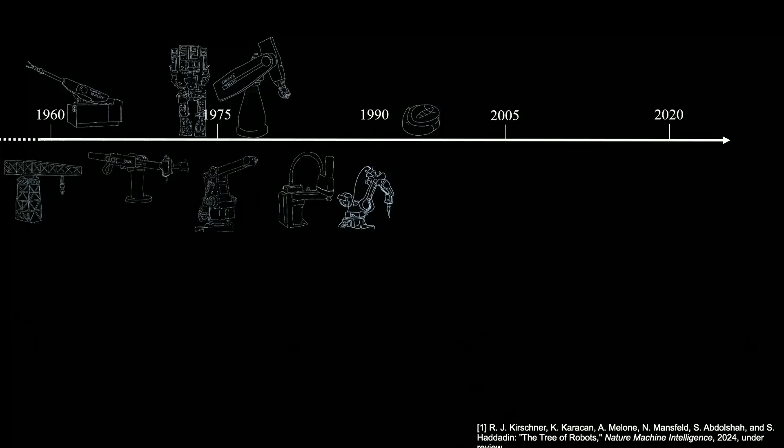One obvious thing happening now is that we see more and more robots coming, iteration after iteration, and we now live in a time where humanoids become reality, at least according to media and many videos. Compared to when I was a student, and compared to my teachers' time as students, robotics seems to be taking exponential leaps.

From the embodiment side, it feels like a decadal problem—it typically takes 10 to 20 years to get a new generation of robots. I was myself involved in one of these, as Thorsten mentioned. At the same time, this is the limitation we dramatically face.

My talk today is really about how we can accelerate that—not just looking at robotics as embodiment, but also intelligence, and how we can accelerate both. We all agree that on the intelligence level, algorithms and AI have made great progress accelerating over recent years. But the same question applies to embodiment: how can we increase the speed and capabilities of robots beyond what we see today?

Compared to when I was a student, now as a professor doing research, I feel something is missing—we need to speed up to keep pace with the amazing progress happening at the intelligence level. With the dawn of AI over the last 10 years, there is so much potential. How can we really use this human-AI cooperation to accelerate progress?

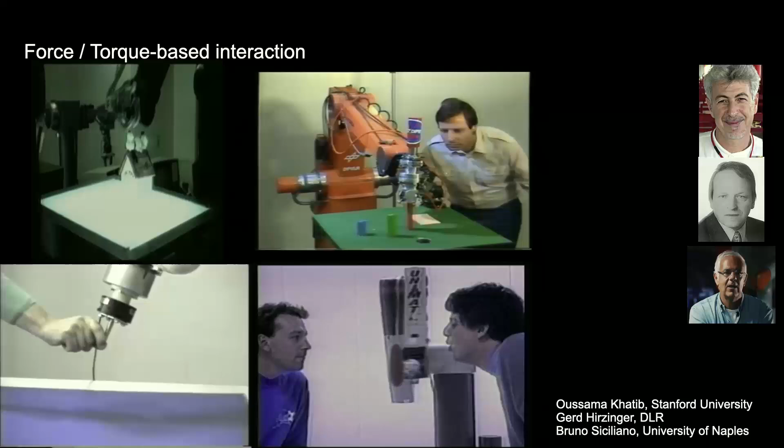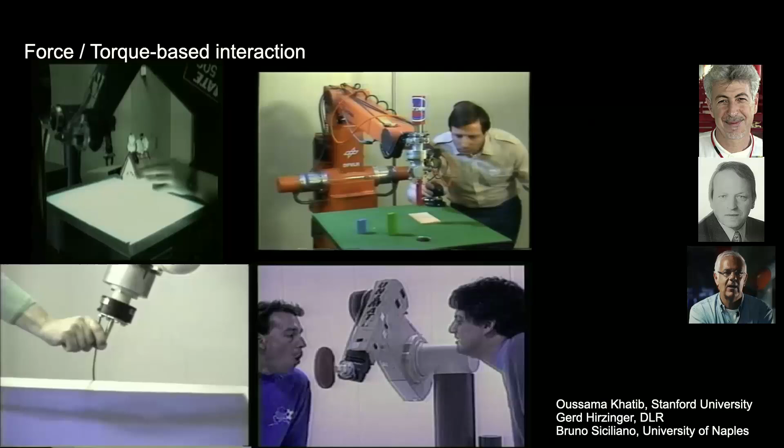They laid the foundation for the robots we have today—we heard about the Franka robot—providing the inspiration and fundamental basis that I, along with many of my colleagues and students, could draw from.

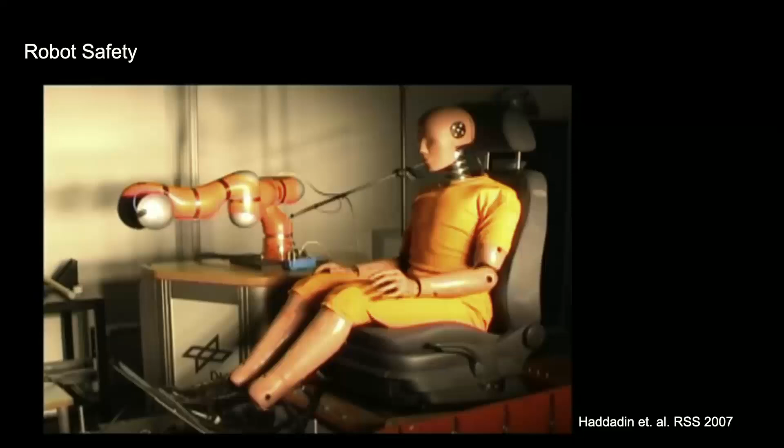We have obviously all kinds of research, so this is something I needed to do when I was a student. Robot safety was a big thing back then, because there was this idea that humans and robots cannot collaborate. Around the mid-2000s, it was common knowledge according to standards that humans and robots shouldn't share workspaces. So lots of my work was about that.

Back then, at my time at DLR, which was really a great time, I was tasked with the idea of, okay, can we actually make robots safe, and how can we quantify the safety levels there? And obviously I found some interesting results. They were kind of contradicting the previous state of the art, in the sense that maybe we actually have a chance to collaborate, and there's evidence based on crash testing, but there was hard belief against that.

Back then I thought, okay, there is a - I'm half Finnish, my mother is Finnish - so I thought of the Helsinki Declaration, and I did these experiments to show that these robots are safe.

So this was at night, kind of 6 hours of crash testing with my own body. But I think it led to this understanding that humans and robots can interact with each other safely, and the human is victorious over the machine, as long as the machine is lightweight, safe, and equipped with certain sensors and collision detection algorithms. We kind of have a good time there.

At the same time, we were working with KUKA, one of the biggest European robot manufacturers, developing all these collision handling algorithms that many of you probably know. The idea was really to make these robots safe for interaction, but also to break ground in terms of what became this collaborative robotics, soft robots and tactile robots that we see today. So really the early days of bringing this technology to reality.

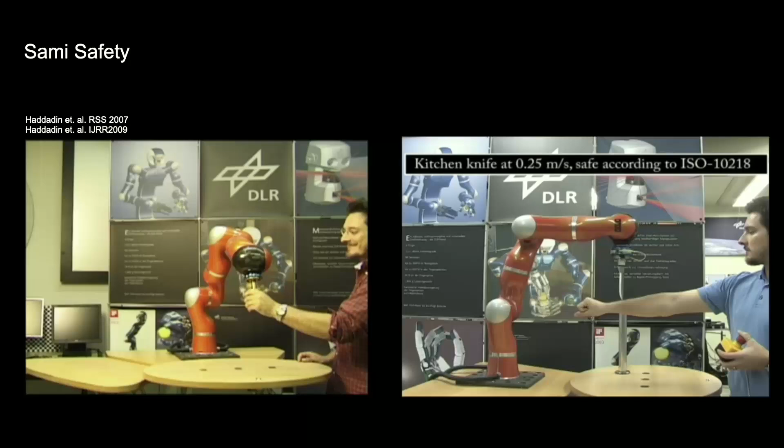This has been a tremendous effort together with Alin Albu-Schäffer and Alessandro De Luca back then, in developing these systems and really commercializing them, bringing them to reality, and I think being one of the key elements in human-robot collaboration and interaction in the real world.

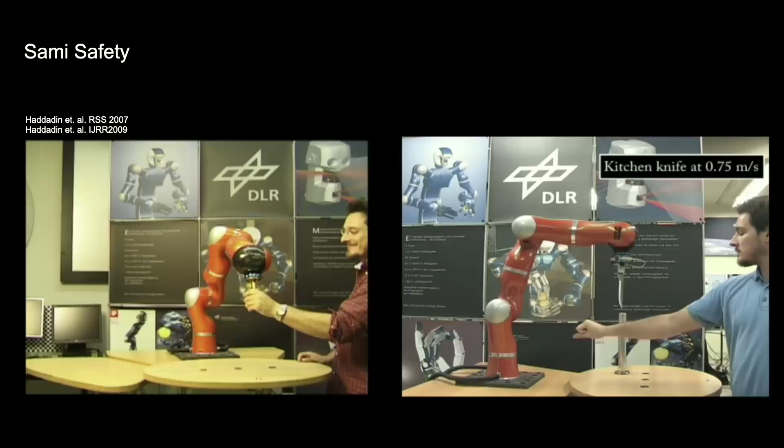So with this basic result, we could really draw, after my time at DLR, when we were founding Franka Emika and really building everything from scratch again. We were actually tasked to build this from scratch. We couldn't really draw from the previous technology because there were some licensing agreements between DLR and KUKA, so we actually had to reinvent everything. This was a very interesting task, to really think from scratch how to build a robot.

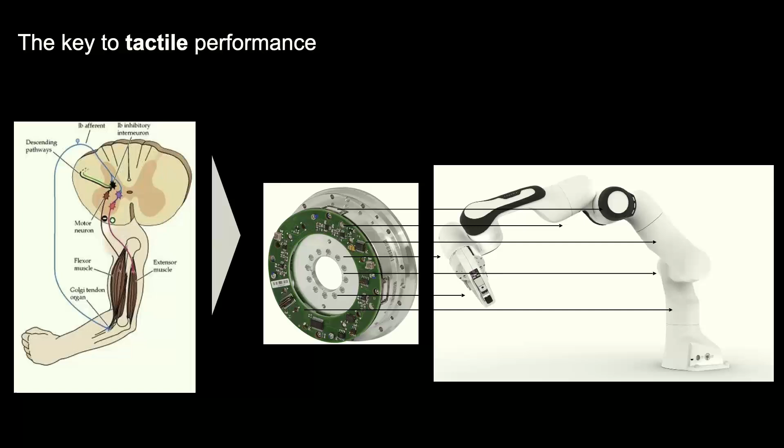This has been more than 10 years ago. Actually, I feel the Franka system is already a matured kid, maybe 11 years old nowadays. Back then, the fundamental idea was drawing from inspiration from the late 70s, early 80s and 90s about torque control, lightweight robots, and so on, but really bringing this to the next level and trying to build a technology that nowadays has also been instrumental for the big dawn of humanoids we see today.

So obviously, algorithms were always very important. From dynamics models to reflex algorithms, machine learning on the low level, really to handle all the inaccuracies at very high speeds. So there were very strong requirements on safety, on accuracy, and so on, but also on what we call tactile programming languages - programming languages that actually speak more than just motion, but actually interaction, so forces and velocity at the same time.

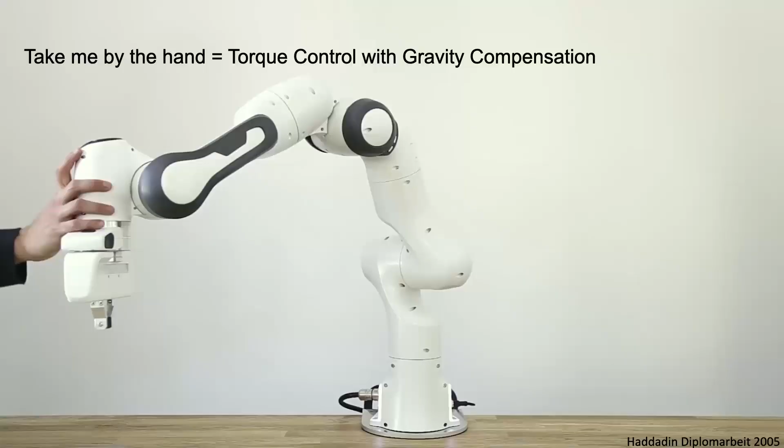So very much aligned with the thinking of Stefano Stramigioli, who is also with us today, and who has been a great source of inspiration for many things I've been conceptualizing together with my teams. So the idea was really to bring robots to life that have all these basic capabilities of torque control, gravity compensation.

That was not new back then, but really on the next level, new algorithms that really outperform what has been there before, and is kind of state of the art today, and everybody has access to that, which I think is really, really amazing for me as a researcher.

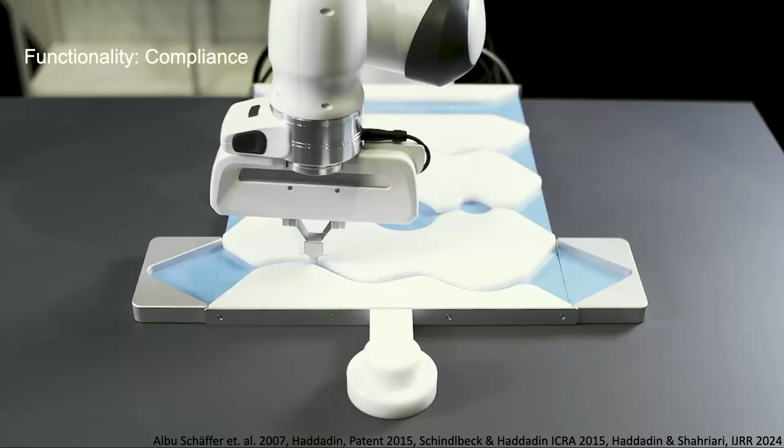So I'm very glad that we could help the community have access to torque control, as Osama always says, the only interface that we all need. I think it's really important that this torque control, compliance, impedance control really became reality, became a widespread technology, and nowadays it's not possible to think that robots need to be rigid.

They have to be soft, they have to be tactile, they have to be reflexive. All these things have become a reality, but in particular they have to be safe and reflexive for interaction with the environment. So this has been proprioceptive collision handling, kind of the next generation of what we developed together with Alessandro, but to the next level so we could go through certification and safety.

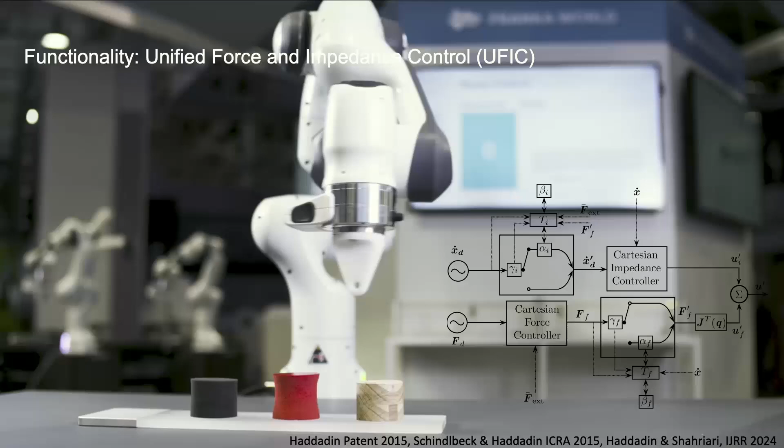The main point was really to show not only collision detection and reaction, but also to be able to control interaction forces and be compliant at the same time without needing to know the environment. So soon there's going to be a new IJRR paper about unified force impedance control, which is the fundamental control technique behind the Franka system to do all the things you see nowadays.

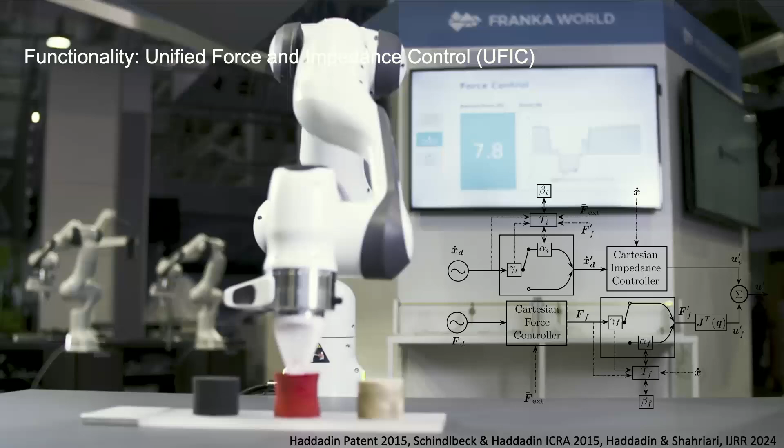This idea behind unified force impedance control was to bring all that together under the energy-aware control framework, something I've been working a lot on with my student Erfan Shahriari over the last year, who has been really important in bringing this together with me to some maturity level. We could solve that from a theoretical level quite fundamentally.

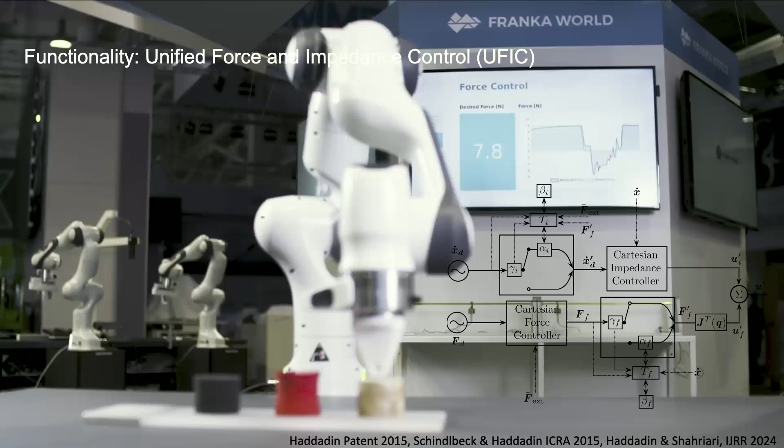The idea being to unify impedance control, so being compliant, but also being able to accurately regulate forces and track forces under the stability guarantees of the energy-based frameworks.

So all these bases were laying the foundations, and now many of you have access to that, and I'm very proud to have done that.

So it's really something that I was not thinking about as an entrepreneur. I founded Franka because I didn't get money from the German government, to be honest. I still have a letter that actually says your ideas are not worth following, signed by Fraunhofer.

So for the guys from Fraunhofer, that's something that has always stayed with me, that it's really important to think that these hopes and dreams in your science, to accelerate your own science, are really the best things to follow. And if you think it's worth it, then I think many other researchers are also thinking it's worth it. And that's kind of what I feel is a very big gift to me.

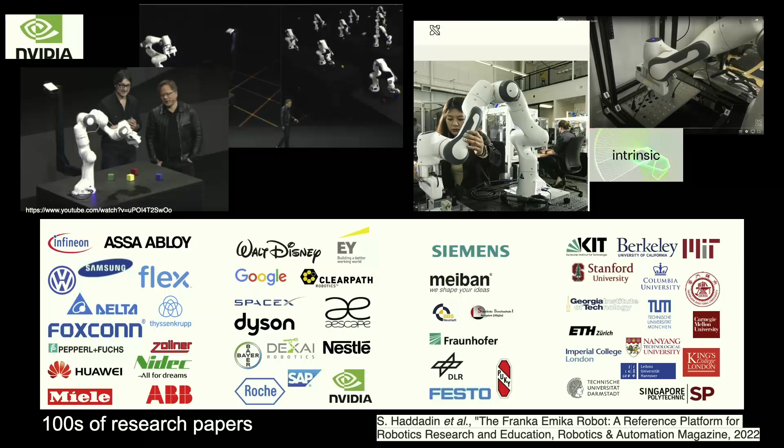And I'm very thankful for all of you to have made that such a big success. Apart from that, I think the statistics were kind of amazing, because I really loved that many people are publishing with the Franka system.

And so it's worth that I spent almost a decade of my life developing this, together with a great team, which now is taking things further for the years ahead.

So I think what's important at this point is that before we go into the part of accelerating on the embodiment, I want to say this is kind of the state of the art today, but I argue that this took quite some time. I want to first talk about the intelligence accelerator.

So let's bear with me for a second that we keep the embodiment constant, and we try to look at the intelligence and how we can accelerate intelligence in manipulation, focusing on the interaction with the world.

And with this basis of control, I think it's really important to see that many of the things we've been doing, that were successful and became commercial in the industrial sector, were more and more based on this idea of models meets data, you could say.

So the first chapter is about the intelligence accelerator. I think we've all been inspired by lots of the work that went more than a decade ago between Google and OpenAI, who originally started in robotics. It was amazing to see that data is not inherently solving the robotics problem, but you can in fact do something with it. It was a great experiment back then, not as successful as colleagues thought, but it was a push towards using more data-intensive algorithms in robotics, which has really drawn a lot of my attention.

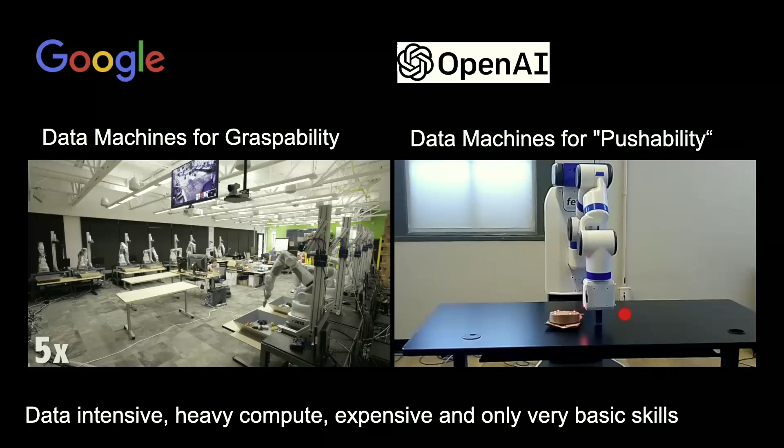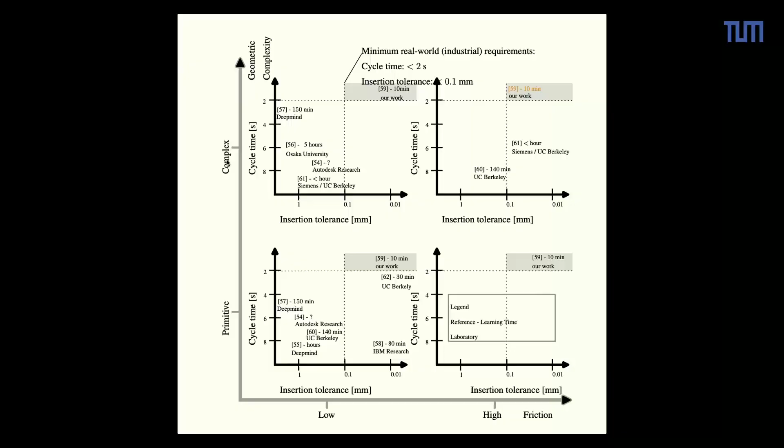This has been our ambition, and I think we try to really solve that problem to some extent. Here you can see some work of Lars and Flo.

Lars recently graduated and is now commercializing this technology with Franka. It's really about the idea of using structured learning approaches which integrate well with the impedance and force impedance control frameworks we've been doing, and lots of nonlinear adaptive control we did with Etienne Burdet from Imperial College, to actually solve very challenging peg-and-hole problems, such as the key into the hole, in order to really outperform end-to-end reinforcement learning algorithms and others.

What's really important is not so much that you can outperform a reinforcement learner, but that the integration of control and data-driven algorithms is really promising, and you can actually achieve something that becomes reality and matches both the requirements in terms of insertion tolerances, but also in terms of speed - cycle time - so performance in the end.

This is something I believe is extremely important for us as a community to move forward, not at these two ends of the spectrum, but to really try to leverage that much more.

PSP is this fundamental idea of what we call tactile skills - the generalization of dynamic movement primitives, or dynamical systems, to energy-based systems that both create wrenches and twists in the end effector spaces, and then interact with a unified force impedance controller or similar-like architectures, and learn these meta parameters that are in place.

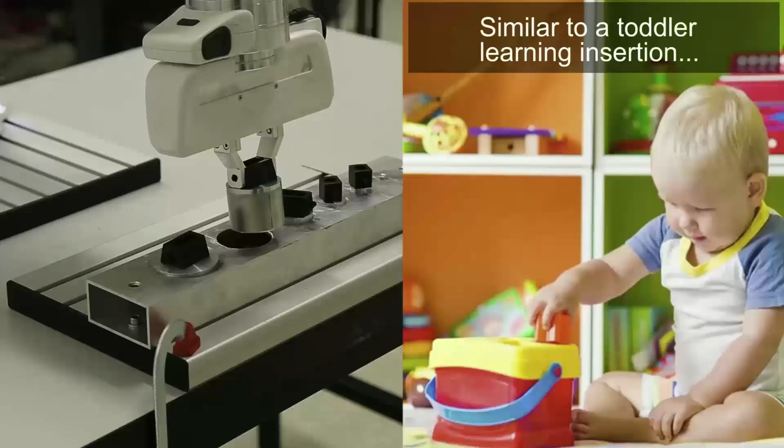So then we were interested in: can we not only learn tasks, but achieve them at industrial grades, really at tasks that were superhuman, faster than all the students in the lab back then. But the fundamental question was also, can we transfer that knowledge from one task, the peg into the hole, to another task, the key into the hole?

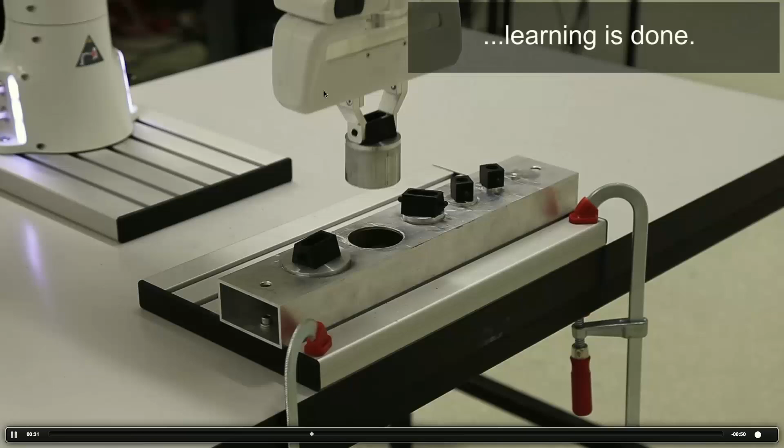Can we basically warm start and use that skill knowledge to transfer it to another example? What we see here is a skill learning algorithm that tries to learn the peg into the hole purely blindly. It just roughly knows where the goal is, able to learn it, which is, by the way, really, really tough to insert.

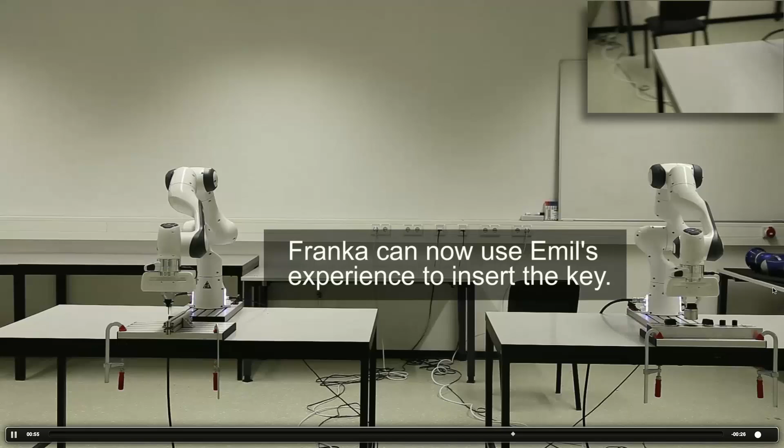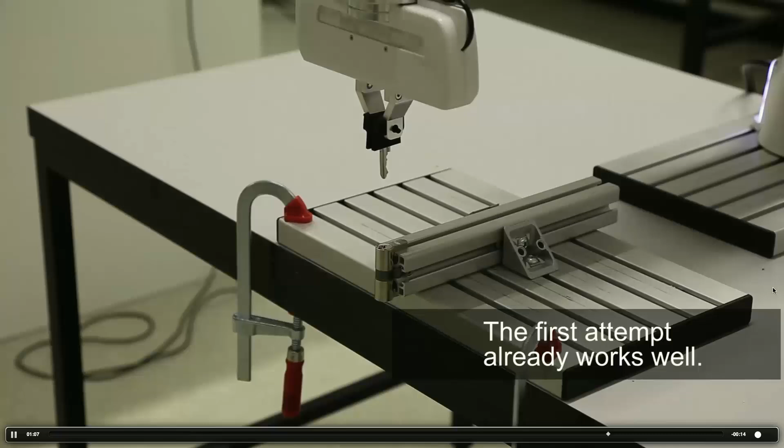But then the system is able to transfer that, after it's successful, to another example, which we see here. This is now directly copy-pasting the learned skill to a key into the hole problem, just geometrically scaling the task frame. And in the end, what's interesting is that you can directly insert. Obviously it's not optimal yet, but there seems to have happened some transfer.

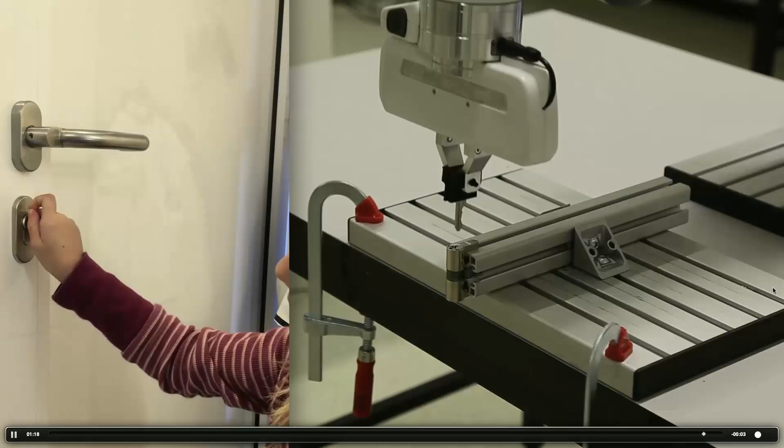The next question we asked ourselves was: if we can solve this machine learning, or skill learning, problem without big compute power—this actually runs on standard PCs—and we can transfer knowledge back and forth, then, since we're working with communication people, what happens if you have a very large network? Inspired by the works we saw before from Google and OpenAI, what happens if we send data around the network, and can we create something that could become an evolution, an avalanche effect of exponential nature through the learning network?

Obviously this is highly connected and related to many works in collective intelligence, swarm intelligence, network robotics, collaborative learning, and federated learning, but in particular also to the fleet learning systems that Dieter, Sergey, and Pieter have been working on over the last more than a decade, focusing on this idea of parallelization of learning.

Our question was more: can we leverage knowledge, translate it to another task, and distribute it back to the network? And what kind of effect can we see if that happens? That's something we called collective learning—the idea of creating a collective mind where, in a way, every robot becomes as smart as the sum of robots, or the collective of the robotic systems.

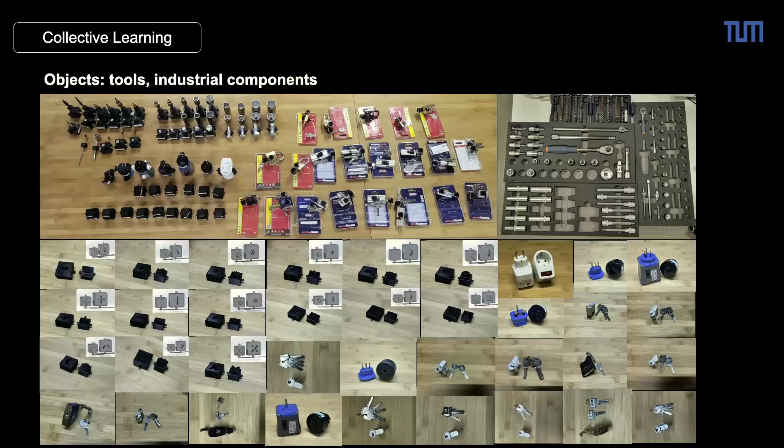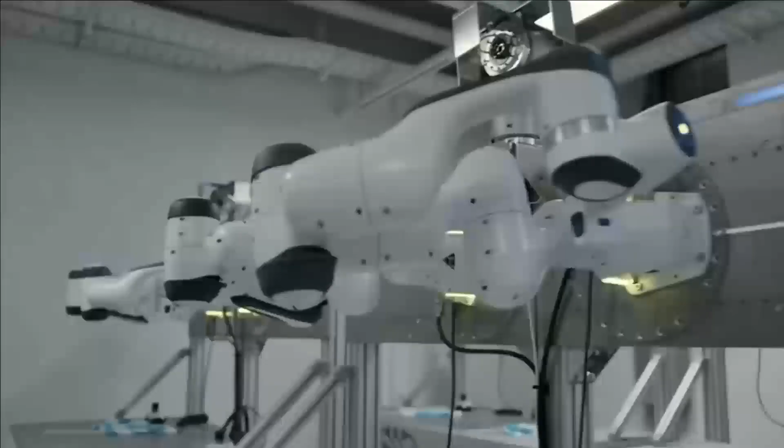What we see here is a video in the Deutsches Museum, kind of the Smithsonian of Germany, where we ran this experiment. What you see now is basically the AI factory, a system we've been developing together with my colleagues at TUM, where the collective learning system is running. This is 25 dual-arm robots, 50 manipulators in total, and each one is controlled by just a single CPU, with the AI running on that.

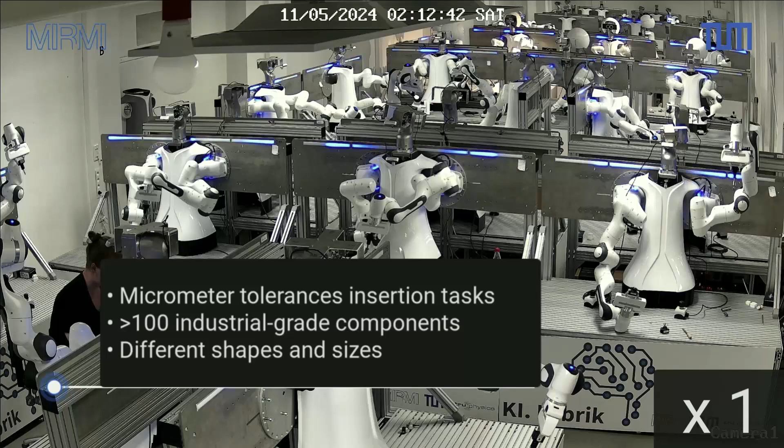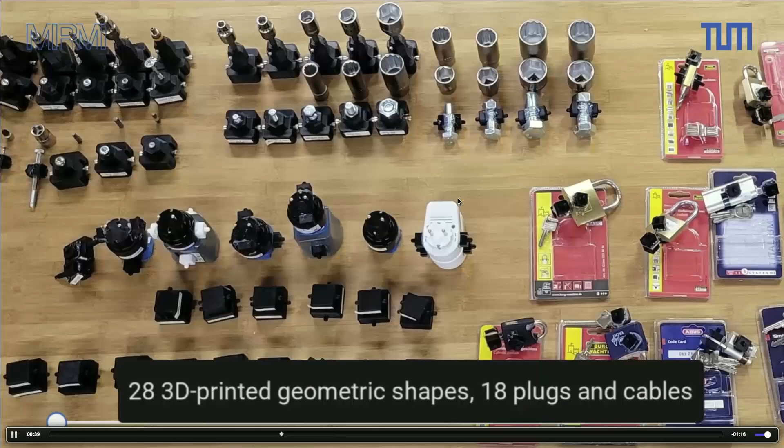So it's pure tactile learning, with the mentioned micrometer tolerances in the insertion, over 100 industrial-grade components of different shapes and sizes. The idea is how fast can these robots learn if they basically push the knowledge of the skill around the network, and can they learn these kinds of skills equally fast as the ones you saw before, going from 25 now to 100.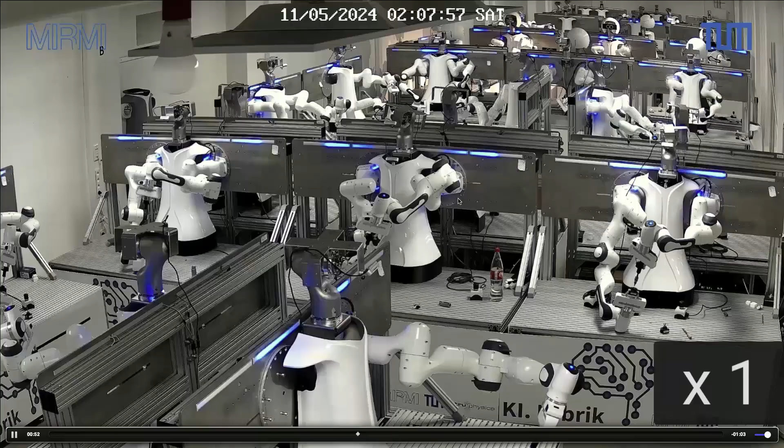This is obviously a huge logistical thing for a non-commercial entity - we're a university - so we really try to be as effective and efficient as possible.

The idea is that all the robots learn autonomously, they continuously share the knowledge, and they draw from the collective. This collective learning system is in the basement of the Deutsches Museum, the German Museum. The idea is that over the course of this, we want to learn 1 million skills over a month - that's the target we set for the next years to come.

What you see there is Samuel Schneider, who is really running the whole experiment basically alone - he's just changing the system. And you see how the robots raise their hand when they're done with it.

If you just learn it with one agent, with a deep learner, you typically have some successes. Here, the robots run over a course of a few hours and now have totally learned the entire task. What you see has been accelerated 70 times, and this is the last one that was learned - in total, 100 skills in, I think, 2 or 3 hours.

That's on industrial grade, so all of them could now, in principle, be deployed, at least from the performance level - obviously not from the implementation, but from the performance level.

What you see is something we've been building in Bavaria, in Munich, together with my colleagues Alois, Eckhard, Achim, Klaus, and others - Darius also very strongly involved. It's the Bavarian AI factory, and the idea is to build a reconfigurable factory that can take a desired building plan and then build a manufacturing system as a service, basically, that's able to use previous skills and apply them to new problems, but in particular learn them on site and really be scalable.

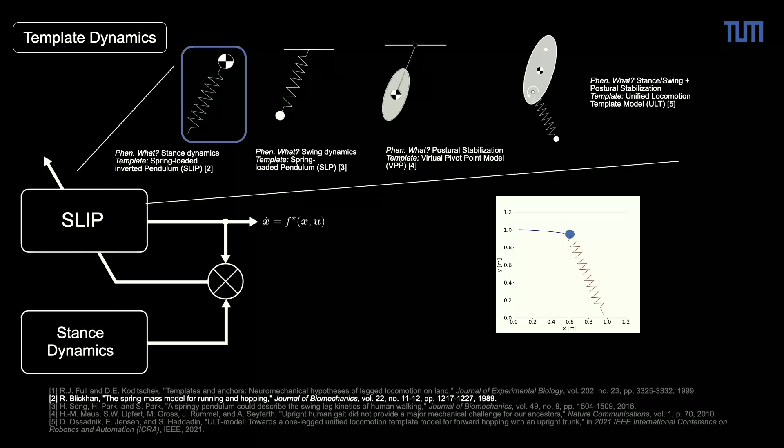This is not a new idea. We've seen template dynamics especially in locomotion everywhere - fantastic models that have explained locomotion and driven the amazing humanoid developments we've seen over the years. Starting from the classical SLIP model, then more complex things like the VPP system interacting with the SLIP model we've worked on, and then the ULT model that tries to explain more complex behaviors.

However, if we go for manipulation, this is largely missing. We typically think in motion plans and configuration spaces. Operational spaces, I think, is the most important representation, developed by Oussama, and it really formed my thinking of robotics. I think this is something we need to formalize more, to think in terms of these template models.

If you think about templates, we could have rigid systems that basically do motion plans, or series elastic systems that basically do resonance systems, and so on.

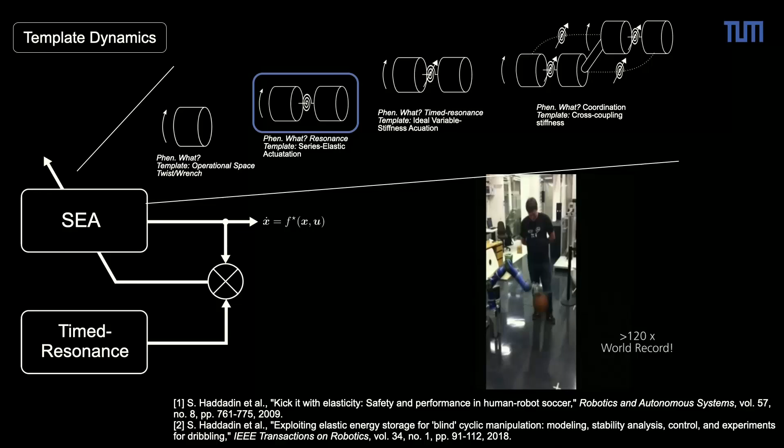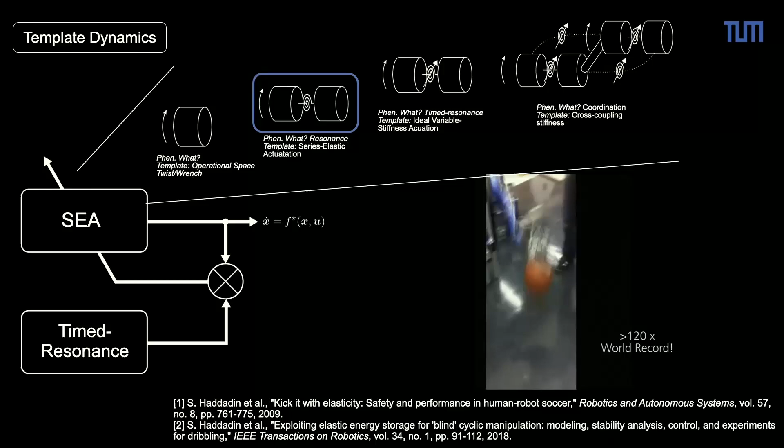This is work we did back at DLR - blind dribbling - which I think was a pretty cool thing, showing how much you can do with a template model, then driven by a much more complex control architecture.

If this is the idea, then SEA, as one example, could be thought of as a great idea to run. However, it turns out SEA is not the best idea to actually do timed resonance templates. We need to work on more complex patterns - coordinated oscillations are great for throwing, running, and so on. But I myself, like many of you, have fought with putting springs in joint space and dealing with almost chaotic nonlinear oscillations and trying to control them, which ultimately, retrospectively, was a very bad idea I think.

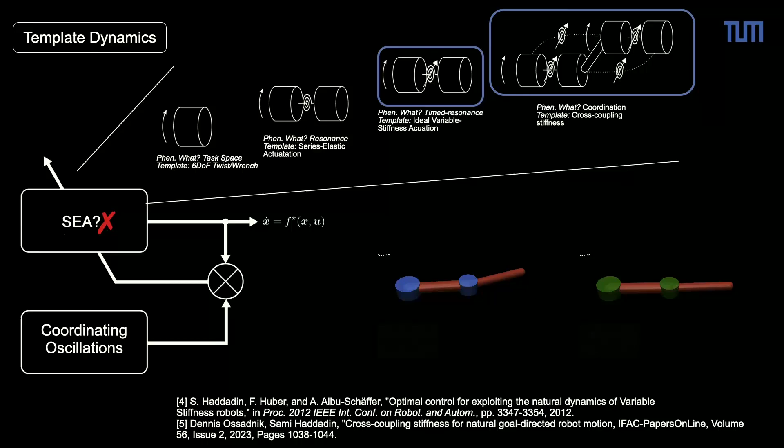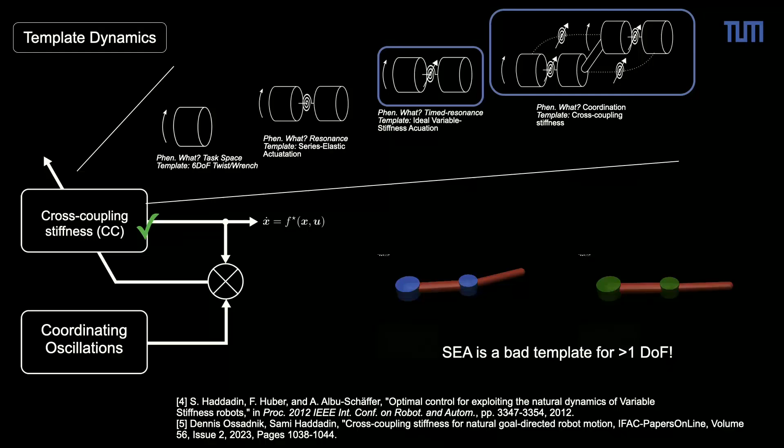So we need to think about very different ideas, and cross-coupling came to mind - which in locomotion they are much ahead of us on, in manipulation, in these coordination questions. This is obviously something that works much better, as we saw here. So SEA is a bad template for one DOF, but also for multiple DOFs.

If we go further and try to think about the anchor dynamics, not the template dynamics, but come closer to the actual system that's closer to the robot - the template dynamics gets input, and now the question is how does the morphology and innate dynamics look that we want to realize, that later guides the development and synthesis of the robot.

What we see here is again a template model that's not that well chosen. This is a series elastic system, with intrinsic compliance - we can validate the same thing with the Franka that is actively compliant. It's very bad at coordinating motions - obviously there are multiple oscillations going on.

If we look at cross-coupling, we can start to generate, via antagonistic actuation as a physical embodiment, a much more coordinated motion that goes over the entire kinematic chain. That's also an interpretation of the cross-coupling problem.

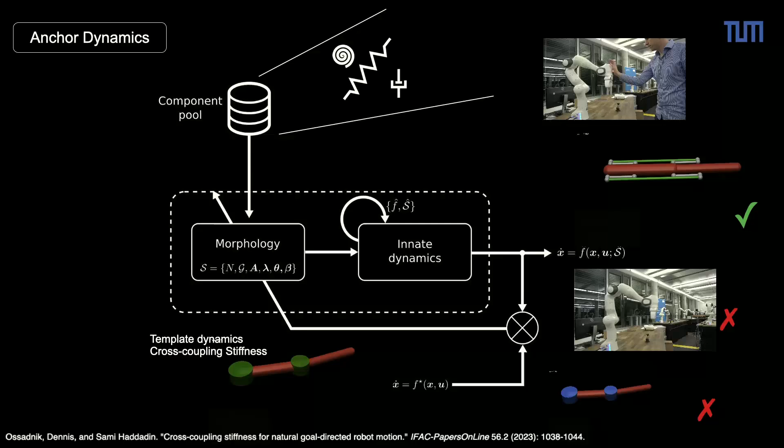Actually, antagonistic systems can be interpreted as cross-coupling implementation in order to do this coordination, which I think is really important because it makes planning, control, and everything much easier the moment you think about that, and you don't try to rectify a diagonal stiffness matrix that has inherent limitations by design.

So if we think about the anchor dynamics, the next thing is obviously to build the morphology. Some work from a really gifted student of mine, Fernando, who has been working on creating the self of a robot, recently published in Science Robotics, proposing how to create autonomously, from pure proprioception, the entire body schema of a robot—the entire kinematics from sensory measurements—and then also the dynamics of the robot, from scratch.

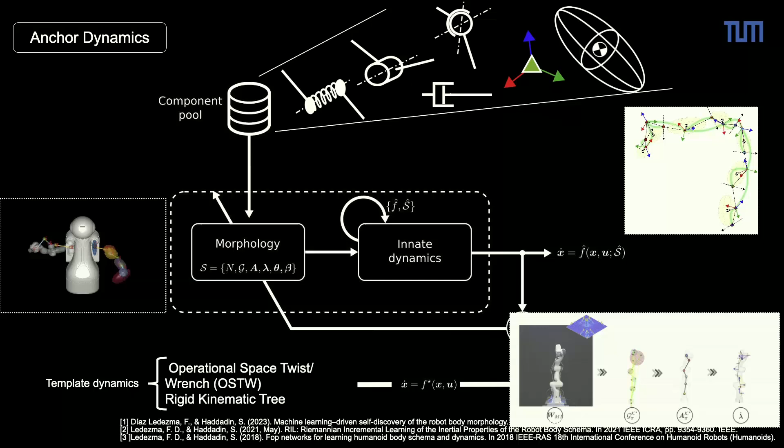I think it's really interesting how this morphology of the system, defined as S—meaning the numbers of degrees of freedom, the connectivity, the adjacency matrices, the kinematics, dynamics, and so on—can in fact be fully automated or automatically generated once you understand the pipeline of algorithms that have to be concatenated with each other. The next question is: can we solve that problem on the next anchor system?

We have recently been proposing a system we call bi-stiffness actuation—the idea of instantaneous binary stiffness adaptation, an ideal implementation of the variable stiffness system where you can jump in stiffness between full stiffness and zero stiffness.

This system is also being presented here in several papers at this conference by Mehmet and Dennis, and I think Edmundo is here too—these three were the main developers of that paradigm. I'm going to show you a bit about that in a second.

The core idea was that the embodiment has to render the desired dynamics, or at least come close to it. This fundamental idea is much more established in locomotion than in manipulation, and I think we actually have a big chance of creating novel robotic systems that can really render the things we want them to do.

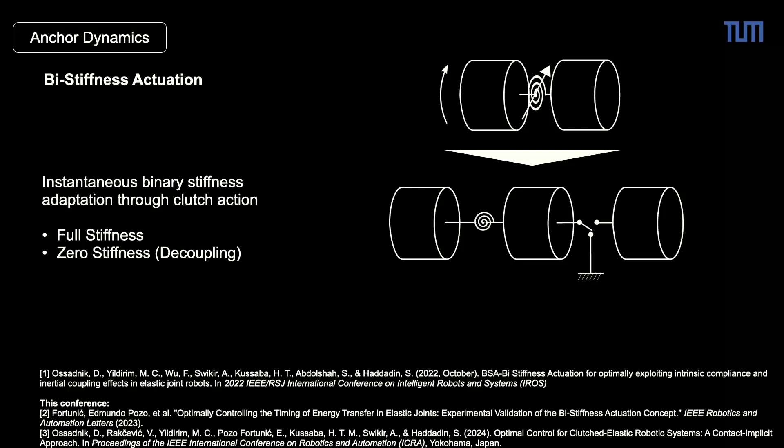But we first need to explain, similar to the locomotion idea of template dynamics and anchor dynamics, how to constructively go down that path. So now let's come to the design and implementation.

That's something that was also just realized tonight. So I really hope that you find that interesting.

I was kind of fascinated by this idea—the idea of autonomous robot evolution, you could say. The idea of having a design co-pilot, really this kind of Jarvis of Iron Man. Can we essentially design in a collaborative process, do the robot synthesis automatically, and then actually have the physical embodiment? I know many people are working on that, but I think it's interesting to think of this not only as a purely design question, but really physically manifested in the physical world, trying to get feedback in the process itself—a cyber-physical evolution, one could say.

What I mean by that is also about the collaborative discovery process—I think it's really important that we think of the human as the center of that design process. If we want a knowledge discovery model trying to discover the space of designs, trying to get to the optimal design given requirements and specifications, then the question is how can we combine the human and the AI intellect in a way that maximally creates progress in this design space.

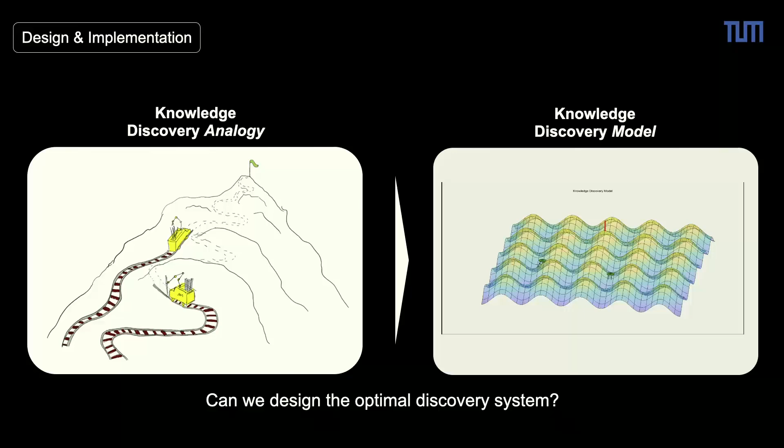The big question is fundamentally that we want to generate what I call the orbit cascades of evolution, where we try to understand the structure and architecture of the system we want to build, and then build all these sub-loops that try to optimize what's going on there.

Johannes Ringwald is doing his thesis on this topic, and he's doing a great deal of work trying to get a kind of little evolution running that is physically manifested. He's had some papers recently on automatically printing robots based on their feedback in the real world.

So basically the real world feeds back into creating new robot designs, still on the mechanism level mainly, but it's really interesting how much you can accelerate the optimization in the AI or digital world by basically grounding through a real-world robot synthesis.

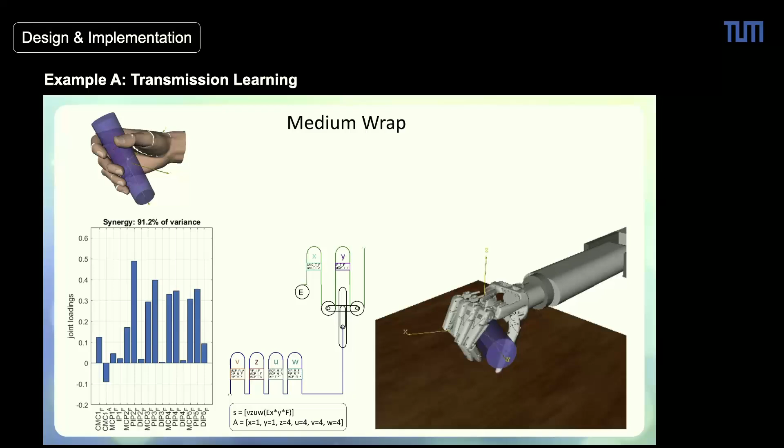One thing we've been working on with Diego for several years has been trying to automatically design drive trains, combining engineering knowledge with data-driven ideas. Can we actually approximate the motion and synergy spaces of the human by integrating the drivetrain in the hand, such that we can do delicate manipulation tasks?

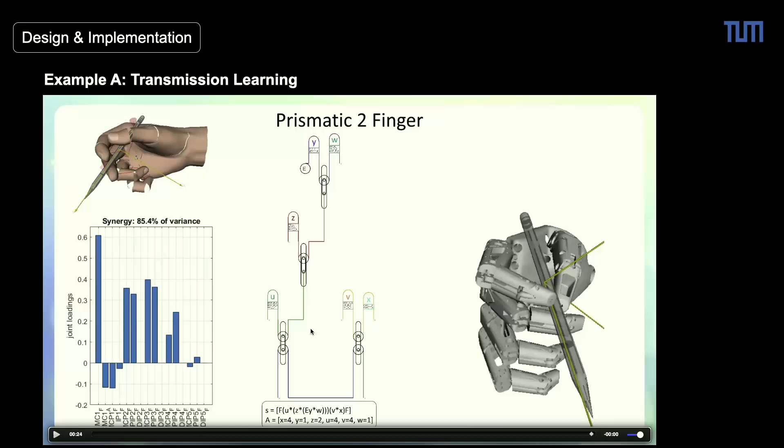We're trying to come from different angles. This is more on the computational level, coming from human information and design paradigms that come from engineering knowledge. But I think what is maybe even more interesting is, can we actually try to physically embed this kind of optimization?

Not only train, build and optimize, but I've been building robots. I want to feel them, I want to see what they do, and it's really hard to do this in an automatic fashion. We call them prototypes, and we try to understand how we can accelerate, but it's hard to understand if you don't think about the structure of the machinery that has to drive that design and synthesis process.

So let's take hands for an example. Hands are kind of the most complex thing we can think of. Still today there is no hand that even comes close to our hands. I think we're light years away from that, to be honest. It's really ridiculous how far we are from the human hand, especially in terms of capability, in terms of tactility, sensor feedback, dexterity, learning ability—this is far beyond.

But I think what is clear is, we need fingertips, right? So let's think about the idea of, can we automatically generate fingertips, at least, because these are the mechanical interfaces to the object or to the world that we actually interact with. There are countless hand morphologies, but in the end we want the best fingertips, regardless of the morphology of the hand, because these are the fundamental interacting elements with the object. So can we actually find a universal fingertip idea?

Obviously this is a very bold question, but we've found some interesting results. It's very tiny, but I think it's worth sharing. What we've been working on is the autonomous evolution machine that Johannes has been building.

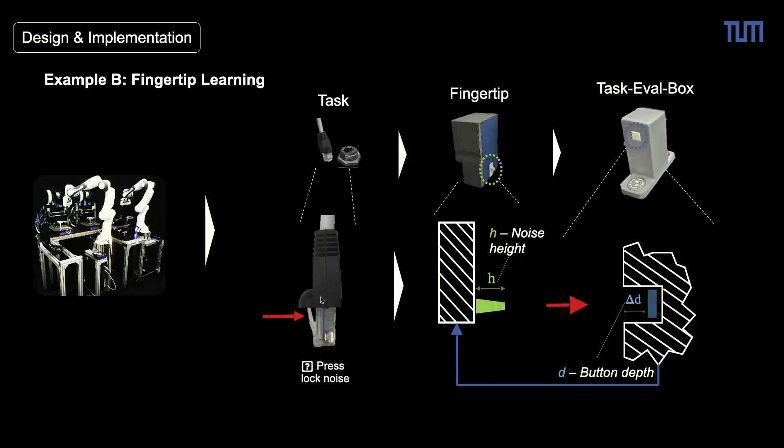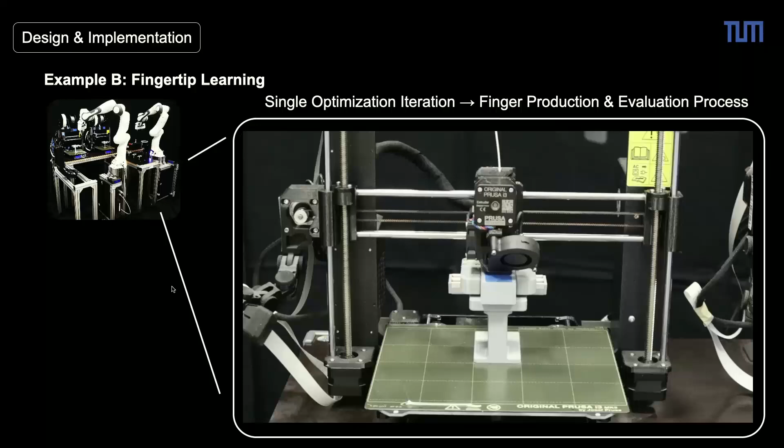So the idea was here—this actually just ran tonight. The robot is grasping templates that are being printed. We had an evolutionary algorithm trying to guess the best end effector. You can see he's trying to push a little knob, so he's building this knob. And now the second robot is grasping the fingers.

Here is this inlet that you see, and it's actually a button that you have to push, but the robot has no idea that there is a button. The question is, can we actually design a fingertip that ultimately ends up pushing this button without knowing the button is there? This sounds like an almost too naive statement and too naive a question to consider, but if you just do that on a computational level, you will never find that button—it's not there in grasp planning. So the question is, can this morphology automatically generate this kind of push into the system?

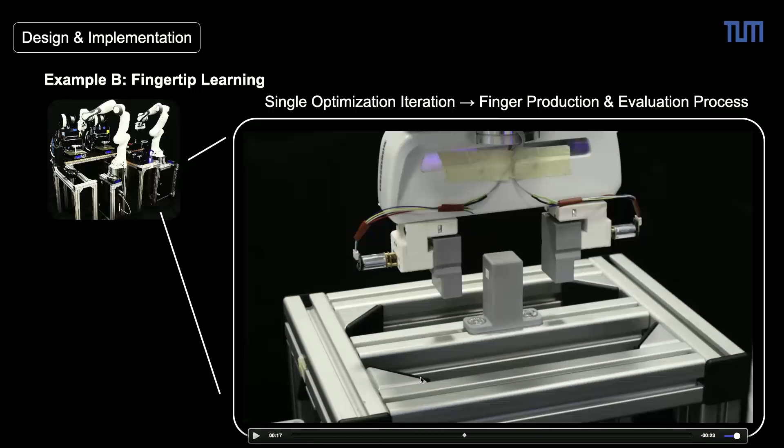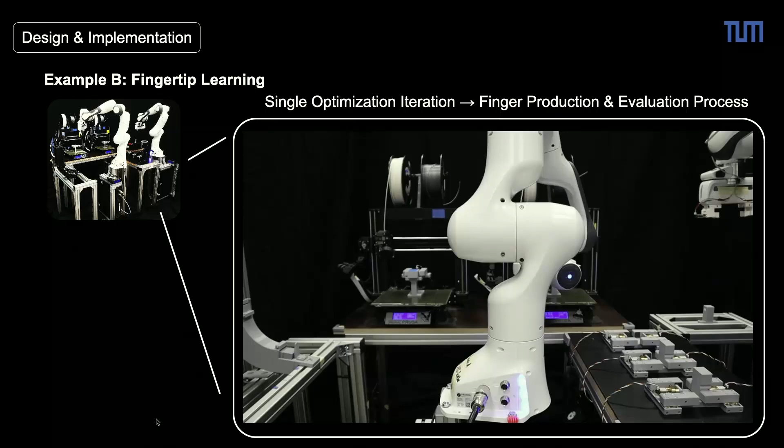And this was something that was actually really part of his main achievement in the thesis, that he's building now these automatic fingertip designs that are grounded in reality. He's then optimizing again in an evolutionary sense, kind of informed by the human who's proposing some designs. And this kind of machinery runs and tries to create this tiny nudge that is then in the end able to grasp the button.

And just tonight he was actually able to, so this is real data, you can see here the evolution going on over iterations, and I think above iteration 20 he was really kind of reliably hitting the button. So that's a first step towards automatically, I think this took about 1 hour until this was created, being able to create parts of a robot fully autonomously.

And I thought this was really kind of interesting. Here you can see how the finger starts to grow, the little finger, in order to then push the button, and the functionality of opening the lid is basically being fed back to the evolutionary system. Could obviously be also a reinforcement learner.

But I think on a long term, it's really important that we think of augmenting the designers. So from unexperienced humans to experienced humans informed by AI, to really scale us up. In my wildest dreams, we would have robots, or an AI design system, that could automatically scale up our design processes, so that we can have thousands of designs parallelly being hypothesized, synthesized, tested out, and then in a day or a week, or at least a month, we might have a robot that actually does what we want it to do. So that's a tiny step in this direction, but I think it's super interesting.

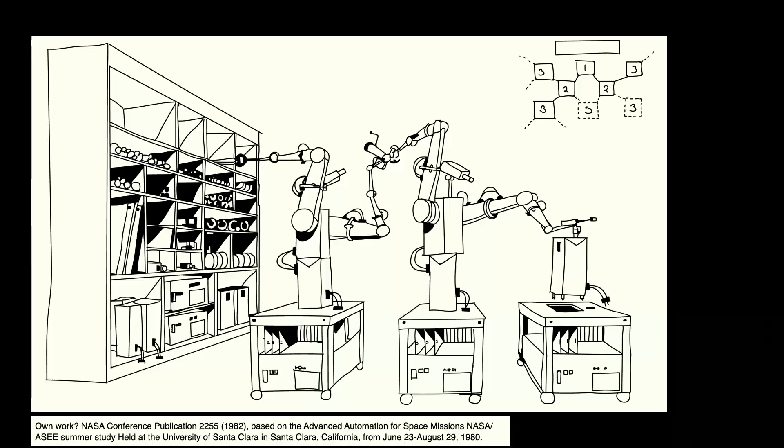And in total, I think it's kind of in the line of thinking of John von Neumann with his self-reproducing automata. It's in alignment with this very nice NASA comic I always like to think of. It was actually published in the year I was born, so I think that's the spirit. And then ultimately also with Konrad Zuse, the inventor of the computer, a German, who was also trying to build a self-assembly machine. So this idea of self-assembly, self-reproduction, I think is super interesting.

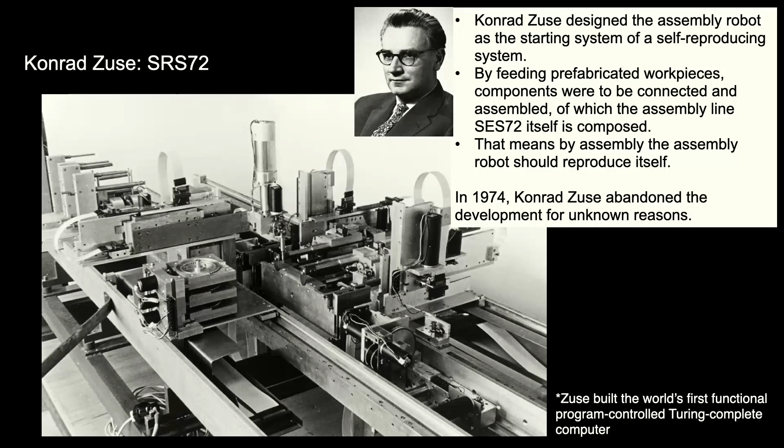And this also was led in the Franka development back then. So the main point about the Franka system back then was also to automatically assemble that system and be able to self-reproduce, to be scalable, right? So this was the first robot that was really being assembled by its brothers and sisters, you could say, and the first automatic robot assembly system that was there. So in this line of thinking, I think this is interesting.

Okay, and then because this is, I think, the last Franka system I wanted to show, I also thought that this is a very nice occasion to give you the back story of Franka Emika and why it was called Franka Emika, because today also my kids are here. And the biggest wonder is obviously why was it called Franka Emika?

I was asked many times, and I always said, well, when I write my memoirs, which I will never write, obviously not famous enough for that, but then I wanted to share that. But I thought a plenary is a very nice occasion to share it, because now you cannot run away, you've got to listen to that.

And so Franka is my eldest daughter. She's 11 and she's here. So she has been the inspiration of Franka Emika and also of the logo. So if you think about the logo of Franka Emika, that's actually my daughter, Franka, who sits with us and who I really love dearly. And Emika is actually the combination of, back then I had only 2 kids, right now I have 3, they're all here. The Emi is my son, Emil, and the second part is Ka, from Franka. So that's the 2 sources of inspiration of Franka Emika.

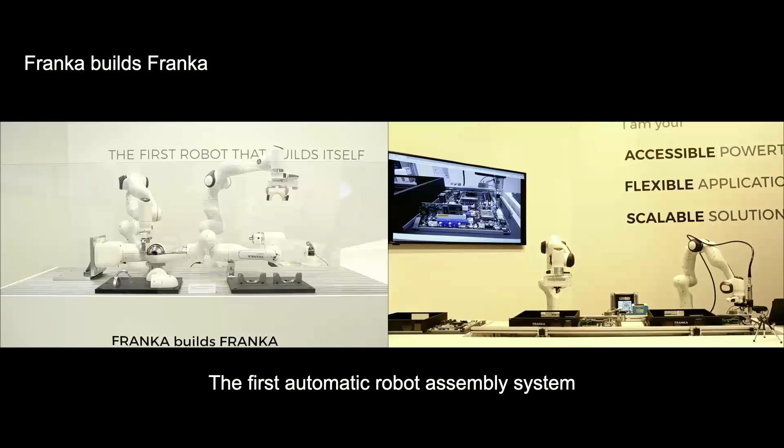Okay, so let's come to key insight 2. I'm not sure, I have to stop. I still have 15 minutes.

So key insight 2: the cooperative human-AI-robot synthesis. This is very humble, so please don't be too mad at me, but we think we can help design and build the components of optimal embodiments. I know a mechanical engineer would never say that—I'm an electrical engineer and computer scientist, I'm allowed to say that. I know mechanical engineers would strongly disagree, but I think it's possible, and I really hope we can accelerate the design of robots.

Okay, let's come to the policy generator—the last part I wanted to discuss, and I think it's really about optimal AI. We've been working on various motion planning, kinodynamic policies, with amazing work by Oussama, Lydia, Steve LaValle, Stefan, and many others who have really transformed our field in generating motion planning. We've also been working on real-time motion planning together with Riddhiman Laha, also here with us, a student of mine who's hopefully soon graduating.

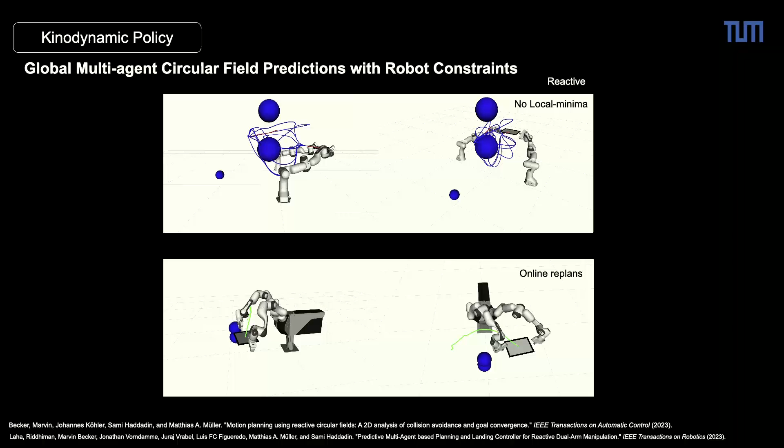We recently had a TRO paper on bridging the gap between multi-agent systems and dynamical systems. For many years we've worked on real-time motion planning in dynamic environments, which I think is successful even for constrained systems such as bimanual setups. But what's clear is that these systems are dynamic for the environment, but not dynamic for the robot—the internal dynamics are basically not respected.

I think what's really important to bridge that gap—this is an experiment we did back then at DLR. If you want to do kinodynamic motion planning, you can only work on that level; you cannot encode the embodied intelligence of the system. If we develop all the systems I was showing you—series elastic, antagonistic systems with elasticities, all the things we've seen—it's pretty clear we cannot leverage that if we just work on the kinodynamic level.

Whether it's collision avoidance or not, you will never exploit the elasticities in the joint. You will never exploit the inertial dynamics. You will never exploit the decoupling that you can do in principle with clutch systems.

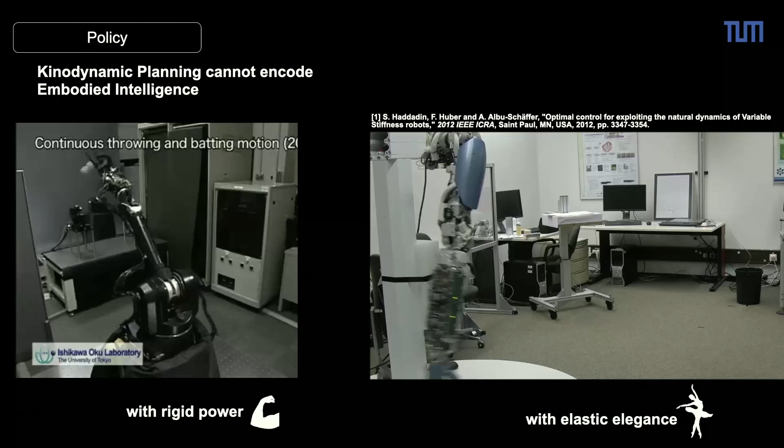So I think it's between rigid—and this is amazing work by Ishikawa many years ago. I still remember when I first saw these videos, I was blown away. I still think many of these works were underappreciated, and it's been amazing—especially the dribbling with two fingers, I always have to talk about that. What was really interesting back then at DLR was this idea of using dynamics and elasticities to store and release energy, creating graceful motions.

However, it was a problem of optimal control—you need to really work on the optimal control problem. It's a pain, it takes forever, it's really hard to find a solver that actually does it. We all know that.

This is a very hard problem, especially if you don't work on template dynamics or simplified dynamics, which never reach full optimality. If you really want to go to the policy level of optimal control, we want closed-form solutions, but they don't exist most of the time, especially for nonlinear systems. So there have been many numerical solutions since the 60s, model predictive control since the mid-80s at least in its first versions, and then neurodynamic programming ideas moving more and more toward reinforcement learning.

I think it's amazing how much has been done there, but it's also clear there have been lots of limitations. All these classifications you see here are some milestone experiments. The combination of reinforcement learning with optimal control was really important for our field, but it still hasn't served the purpose till today, because if you really want to exploit the dynamics, there's still something missing.

So I think what's really important to remember is this idea of exploiting dynamics—most of the time we try to simplify dynamics, but with this we automatically become suboptimal in what we do. So what we've been working on, starting around 2012 when we first published, was what we called an optimal motion framework.

The idea was essentially that we use optimal control. We embrace it - it takes forever, it's annoying, and it takes a lot of time. But why don't we just solve optimal control offline many, many times? Instead of teaching by demonstration, where it's impossible to excite the dynamics, can we learn and optimize that, encode it into whatever kind of representation? Back then, neural networks were not such a big thing yet, so it was hard to encode it there. But anyhow, then generalize in real time. Hopefully, with the right method, we could actually generate optimal control in real time. Wouldn't that be amazing? That would be the dream of a control scientist, to solve this grand challenge of optimal control in real time. So obviously we need to solve the compute problem.

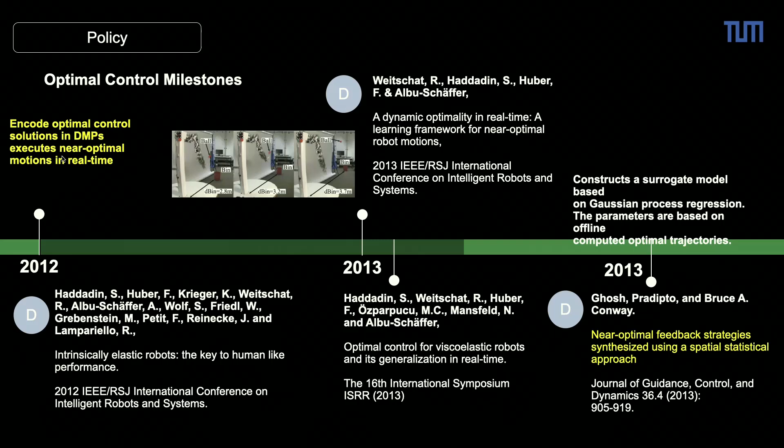Then more and more work has been happening, and in the last years we saw more and more neural networks being used for these kinds of ideas. Obviously lots of applications - I won't go into details since we're running out of time. In the end, what we see now is, for example, neural ODEs and others. We recently had a paper at IFAC that could actually show that with DMPs you can in fact really generalize real-time optimality for certain approaches.

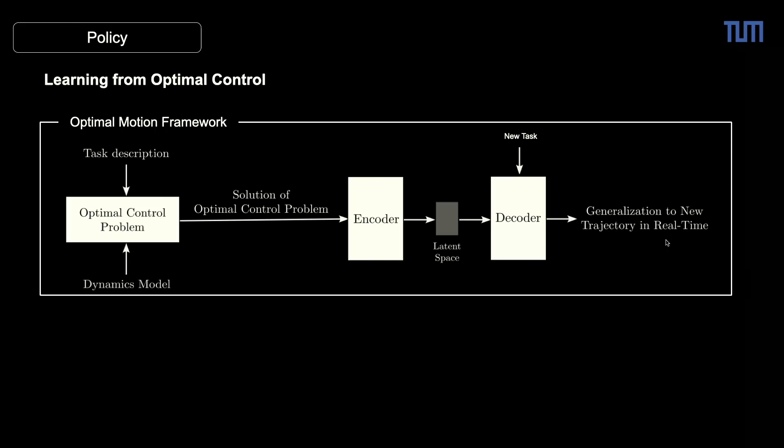Coming back to the idea of what we've been doing - the optimal motion framework, as we call it, basically gets a task description, an optimal control problem, then we solve many of these systems, encode them into a system, in our case a DMP, and then try to generalize in real time given a new task. That was the fundamental idea. As you can see here, an optimization problem, optimal data, encoding it into a large system of ODEs, and then generalizing in real time with a heuristic that turned out to work well.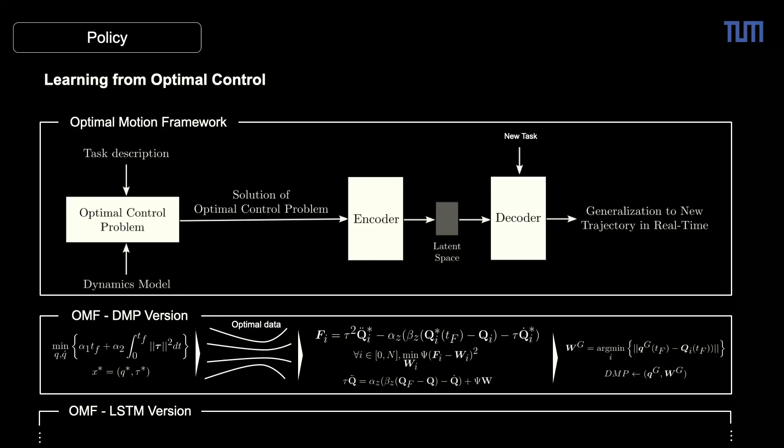There are many versions of that - DMPs, LSTMs, foundation models, and so on. We've been working on many of them at the moment, trying to show that this idea of really learning can be done very simply. We actually see that the embodiment plays a major role. What we see here is the minimum time reaching problem - that's the benchmark I want to discuss quickly with you.

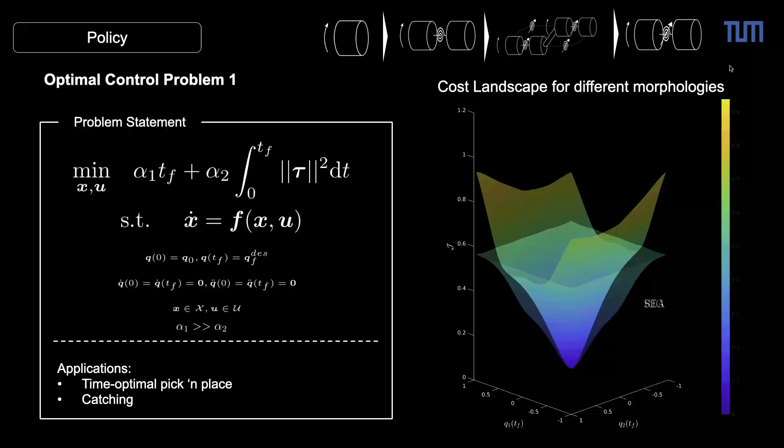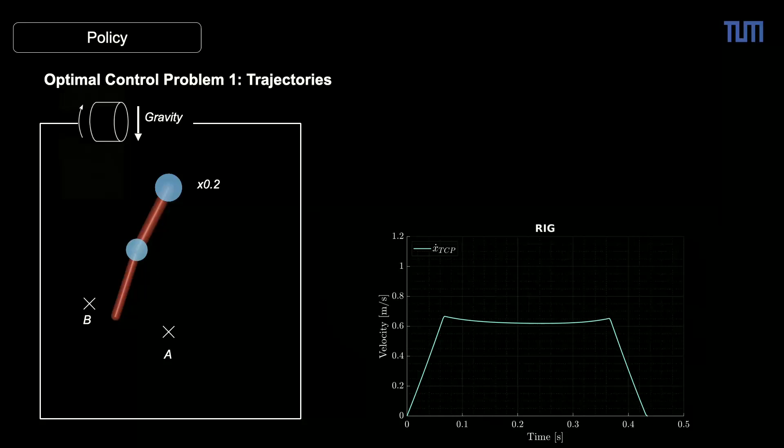This minimum time benchmark, minimum time reaching, shows that we can essentially leverage the dynamics. These are the different morphologies, so the optimalities depending on the morphology - as I said before, that's what we would call embodied intelligence. What you see here now is the trajectories you'd get, for example, for a rigid robot - there's obviously a pretty clear Pontryagin maximum-based motion that you see here.

The control is pretty clear. If you now go for the SEA, you obviously get a wobbly motion - the embodiment isn't that great for this kind of problem of getting optimally somewhere. It's shaking a lot. If you have a system that is now basically coupling-based, then you can really move very gracefully and very nicely - it's compliant, but it regulates itself to be very nice and smooth as it goes from A to B.

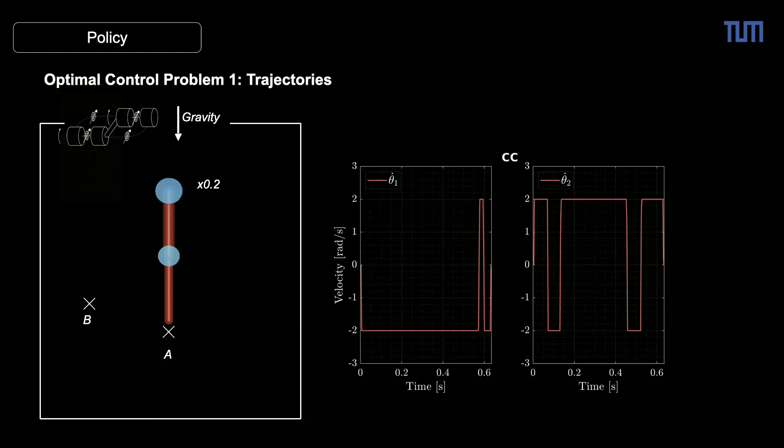So the cross coupling is really important here. The input is also important. The same thing you can do with VSA, variable stiffness actuation. If you can control the stiffness, this is also really working well, and so on and so forth.

So you can create all these dynamics, and you can see that you can solve the optimal control problem offline and then really encode them. So now the question is, how can we encode them, and how optimal is the encoding if we generalize it?

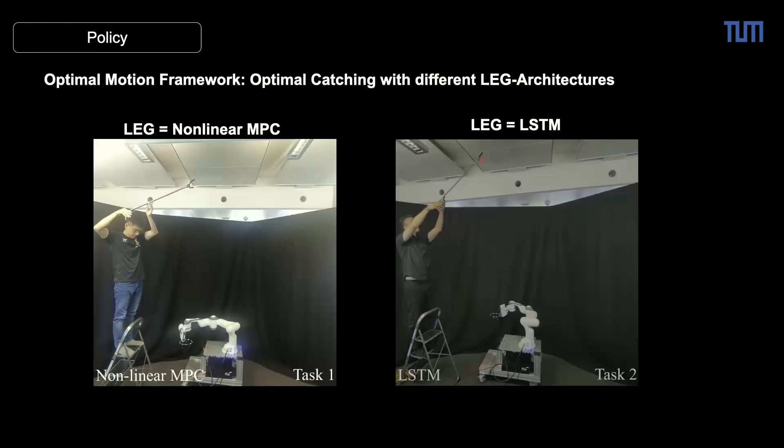So what we see here now is basically nonlinear MPC as an encoder that does not work so well. The LSTM is also not working so well. So we're actually doing the optimal reaching and trying to actually catch the ball with a real-time generalization architecture. This actually runs at a kilohertz.

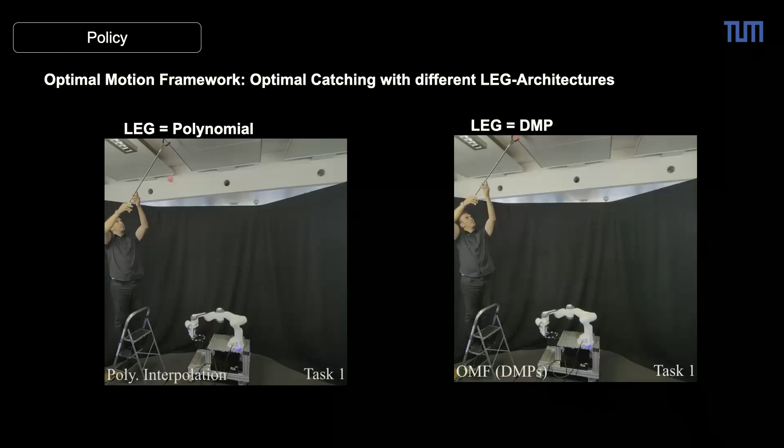So we encode the optimal control into the different learning and generalization architectures. As I said, an MPC, then the LSTM, then we did some further generalizations on polynomial basis, and in the end with a DMP. It seemed that the DMP, at least as of today, has been the most successful encoding. The DMP was really able to generate in real time these optimal motion trajectories.

The question that we could ask is, how optimal is it? And this is something that we can value. In the end, this is kind of the result we have. So for different tasks, nonlinear MPC was not working so well. Maybe there's an implementation problem still, but still.

LSTM kind of performed sometimes. Polynomial, we also had some foundation model that we still couldn't make work. DMP was working quite well, which was kind of, I think, also what we expected, but we're still not married to that. But I think what is more important is that also the data can really be used.

That you can really do very, very tight and interactive representations. Depending on how much data you use, you can find very tight representations in the cost space. So you can actually represent the entire cost value of the system depending on how much data you have. So it's actually able to bring down the optimality error to almost negligible.

So depending on whether you do interpolation or extrapolation, or how many kernels you use, here you can see how they basically become, essentially in the end, a full generalization.

All right, so I think in total what I wanted to give as a take-home message here is that on the policy level, I think the more we will go into more interesting dynamics that are not just rigid body dynamics, but really compliant, energy storage, energy generation, and so on and so forth, the more we will need optimal control and its realization in real time.

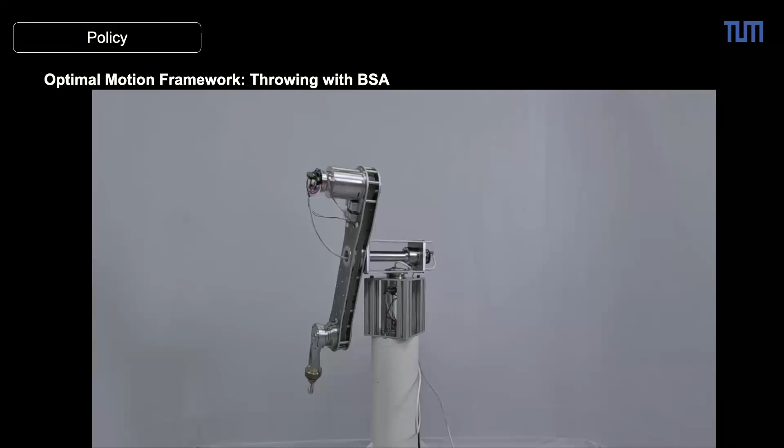What you see here now is that it actually works also on the throwing. So this is the newest system we've been developing. It's still on principal stage, but it's actually fully BSA, so you can basically decouple the system. This is an underhand throw.

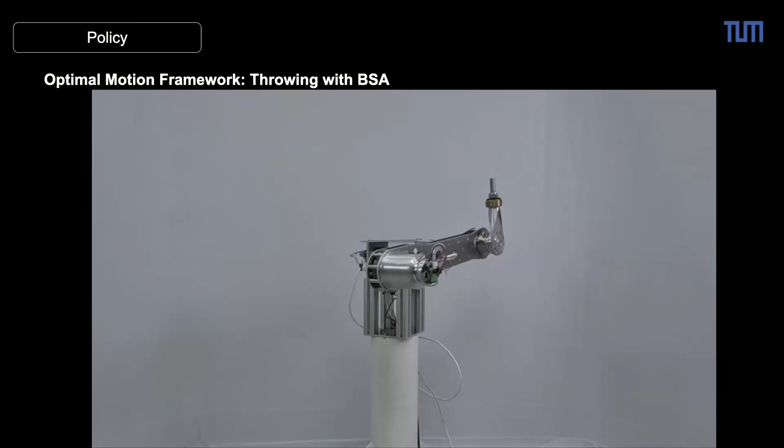You can see how really the dynamic decoupling between the different joints can happen. The same thing for an overhead throw. So we really can now use inertial coupling systemically in real time with an optimal control solver that actually gets the job done, which I think is a very promising direction.

So it's kind of more and more getting into the idea of, optimal AI can be achieved. I think it's absolutely possible. The results show that. And I think that the holy grail of real-time optimal control might actually be within reach.

So it's really worth thinking about how to integrate models, optimal control, and machine learning together. I think we in robotics can really leverage from that. It's a very, very promising direction.

I can only encourage the young students to follow that path and don't just give in to Mephisto. You will only make Gretchen suffer.